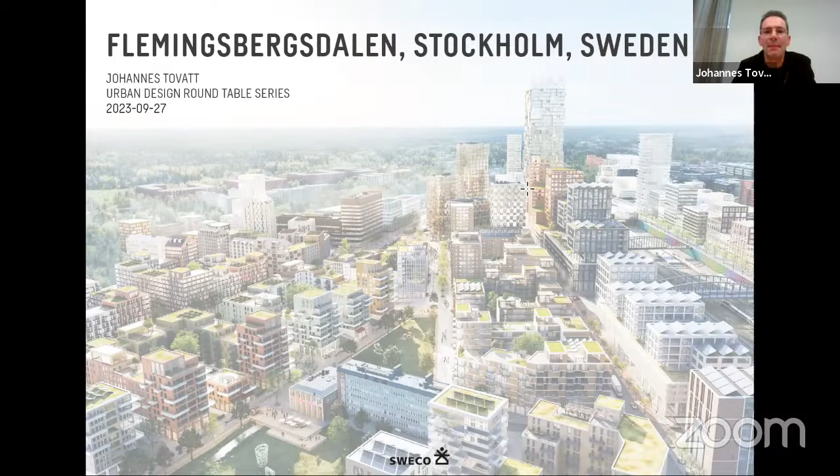Johannes Tovatt is my name, based in the very north of Europe, I would say. I'd like to show you one fairly big project we are doing right now in our office in Sweco, to the south of the city center here in Stockholm. But first let me give you a brief background on who I am, which is probably necessary.

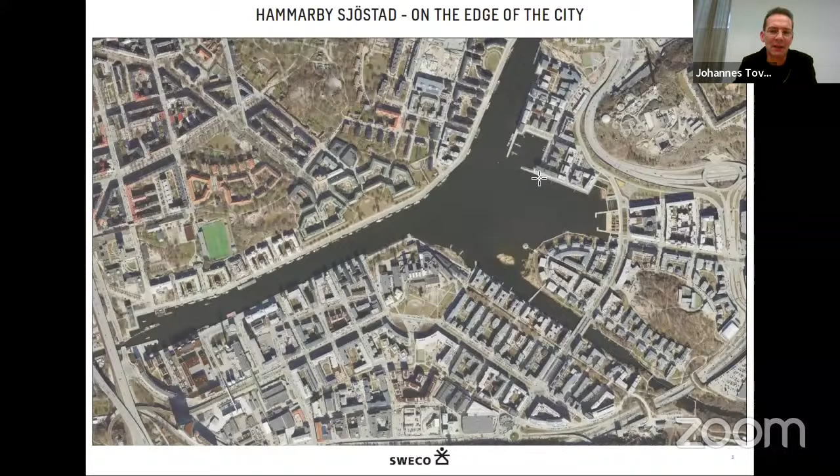I was taught during the 80s and 90s, and my school, one could say, was Hammarby Sjöstad, at the southern fringe of Stockholm, which was a paradigm shift in urban design and public transport, and in many other fields during the 90s. It's still not quite finished, but it's an urban development going on, really the revival of urban space in many ways, with a very clear concept about what a street or a space is, and it has a certain density across.

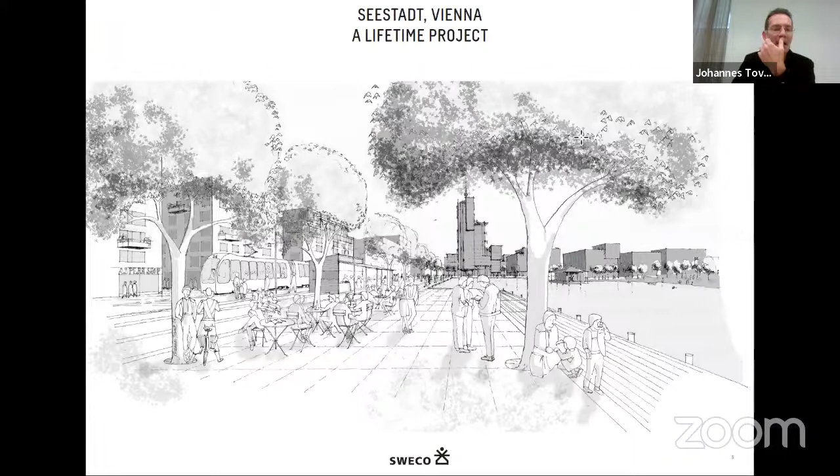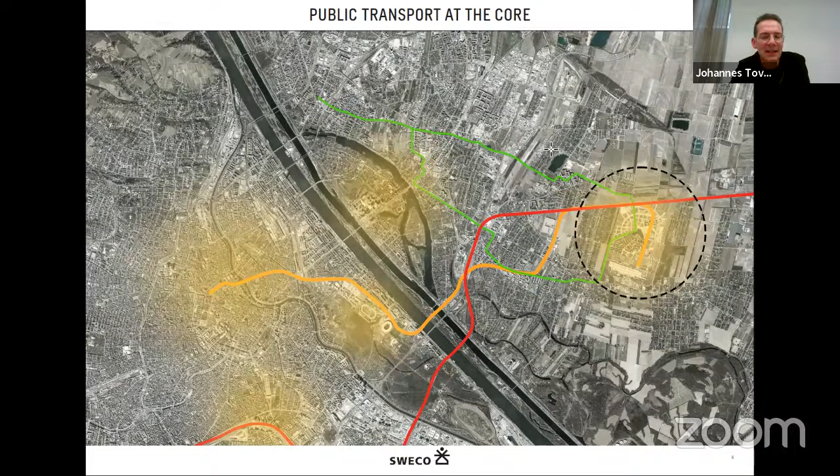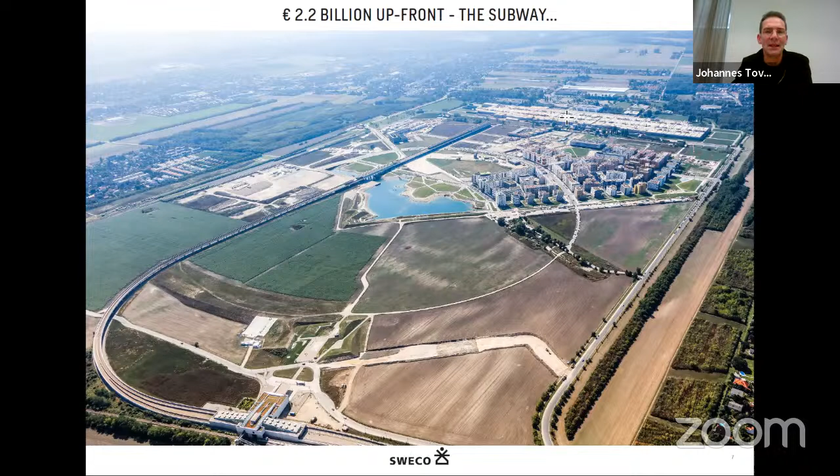I was fortunate then—in the early 2006 I won a competition in Vienna, another sea town, or lake town rather, just outside to the east of Vienna. I mention it because it took me from Stockholm down to Europe, and to a mega project in the Vienna outskirts where public transport and connectivity was at the very core of the business. This image from 2012 shows the Vienna project, where the city and the state invested 2.2 billion euros alone in bringing the metro line to the site, and now it's a fully integrated part of the urban realm and the space.

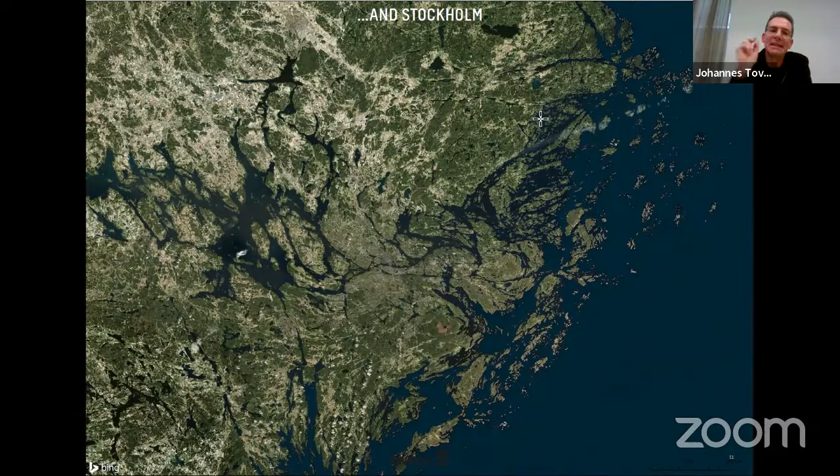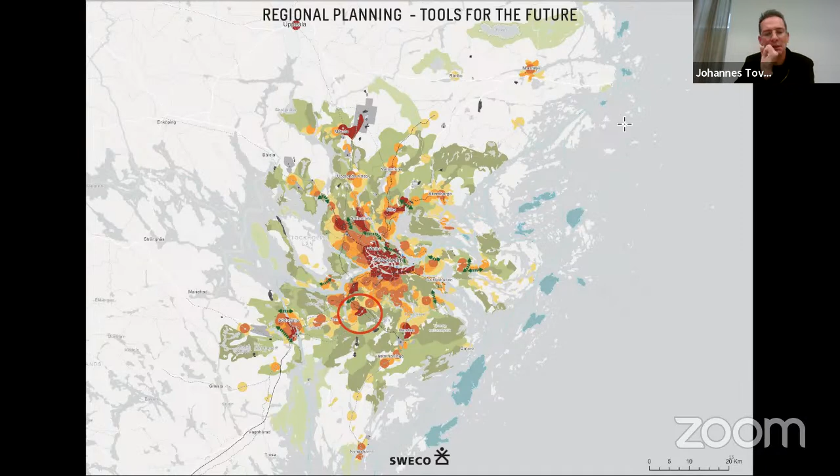One of our tools here in Stockholm—we have many tools to plan cities—is the regional planning tool, which is actually very important in terms of long-term planning for public transport, rails, roads, etc., so that the city works as a whole.

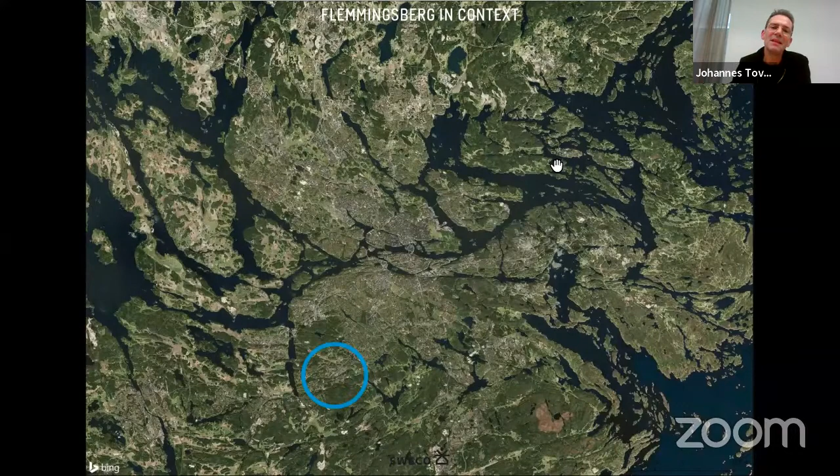My project is one of these regional nodes, which you can almost see here in the map—the very city center, the core meeting point between the Baltic Sea and the lake, occurs in the strait in the center of town. The ambition is to create urban nodes in a half circle around the city center, and the project I'd like to talk about is the blue circle around it.

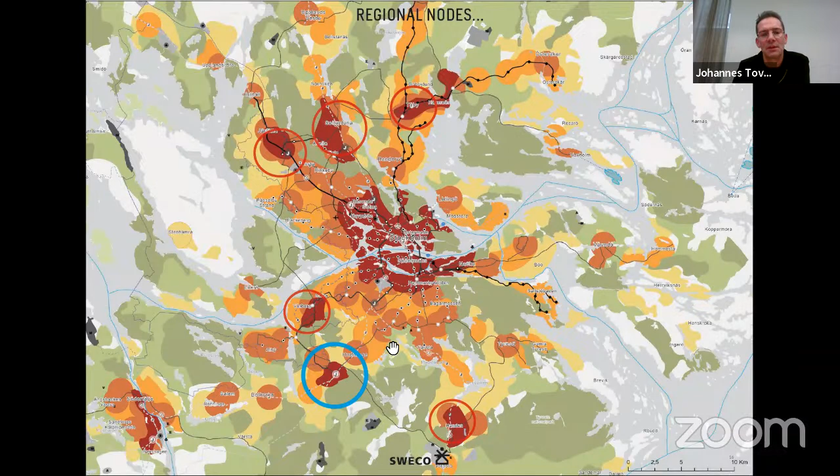Another important topic driving urban design and infrastructure development here is equality issues and social ways ahead, and there's always an ambition connected to big projects like this. As in many other cities around the globe, the southern part of the city has lower income and generally lower education, and this initiative is to turn it around and create more prosperity in the south.

And this is the site of the new regional hub. Difficult to imagine, but it's actually surrounded by vast, big scale housing areas, and a huge hospital, one of Europe's biggest hospitals, but of course it's cut in two, or more or less destroyed by national rail lines and all these barriers.

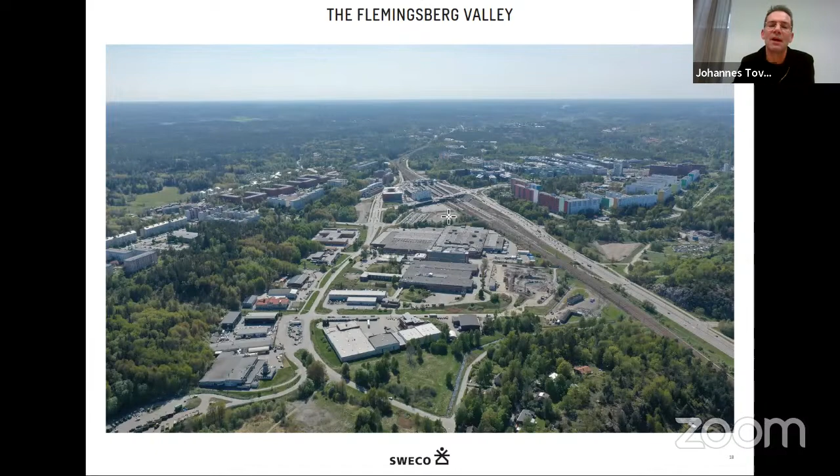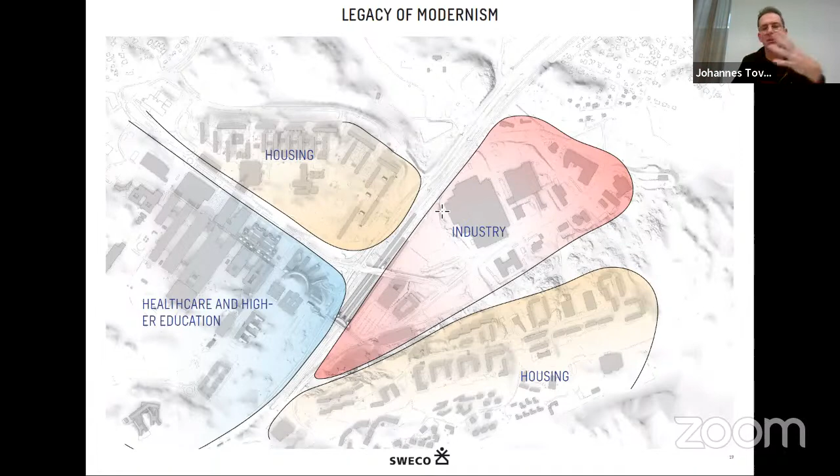It was also planned in a time when, from the modernist era so to speak, segregating people and functions, housing and industry, etc. was the norm. So it all had its spot, and in the middle of this, of course, the railway.

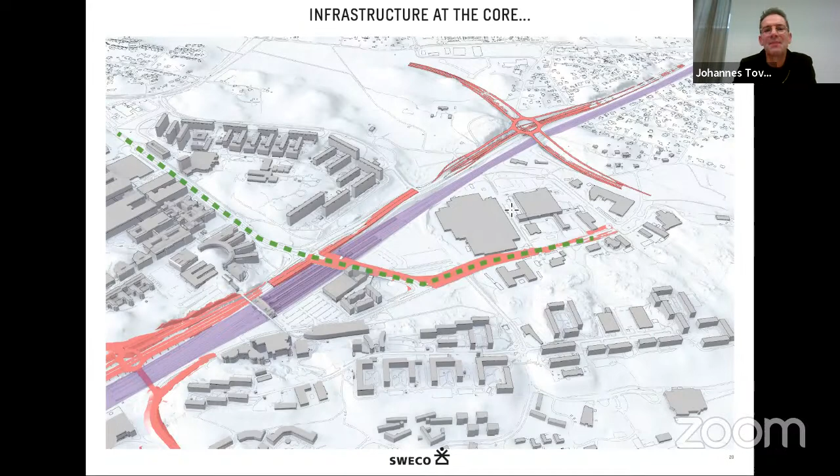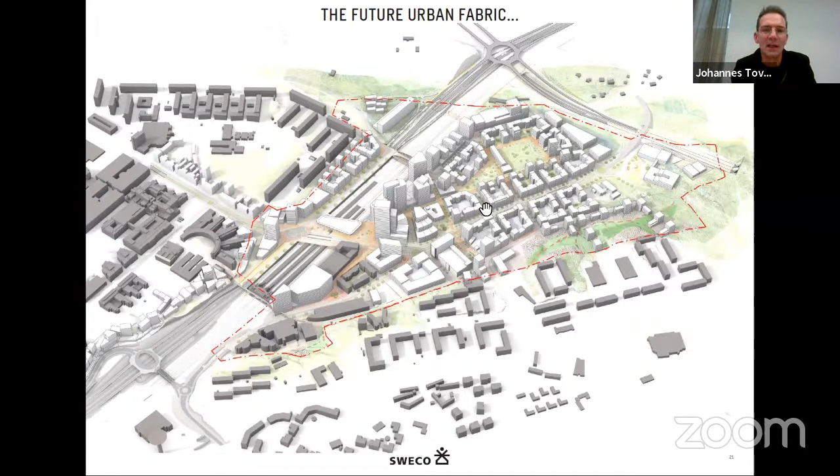And what's happening now is that this kind of infrastructure project is developing even further. High-speed rail, large-scale motorways. Doesn't seem very modern, but it's happening, personally unfortunately. And in this we've been commissioned to develop a new city core, which is quite abstract as an idea - how could you create a new heart in this kind of context?

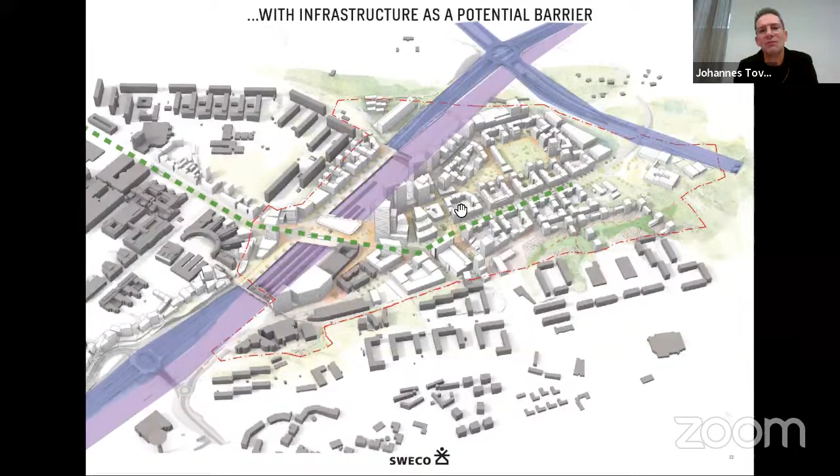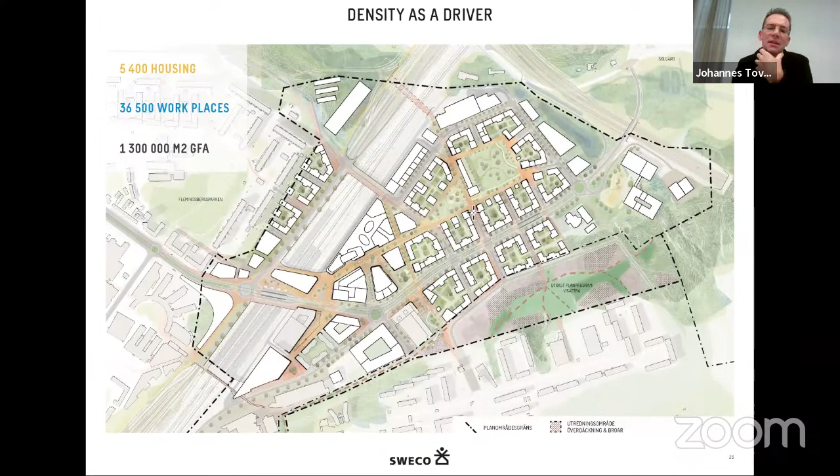And trying to integrate, or at least reduce, the barriers of the infrastructure, present and future. This is quite driven by density - for example, 5,000 housing units and a huge amount of workspace. So it's a high density area, which you can see on this early stage rendering here.

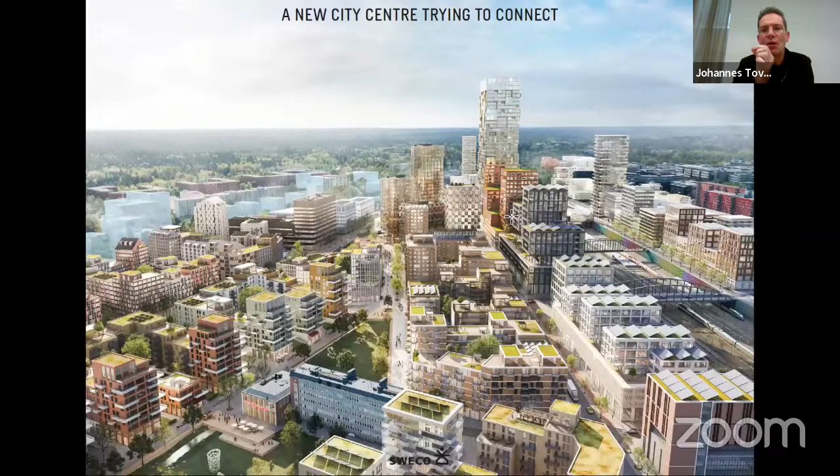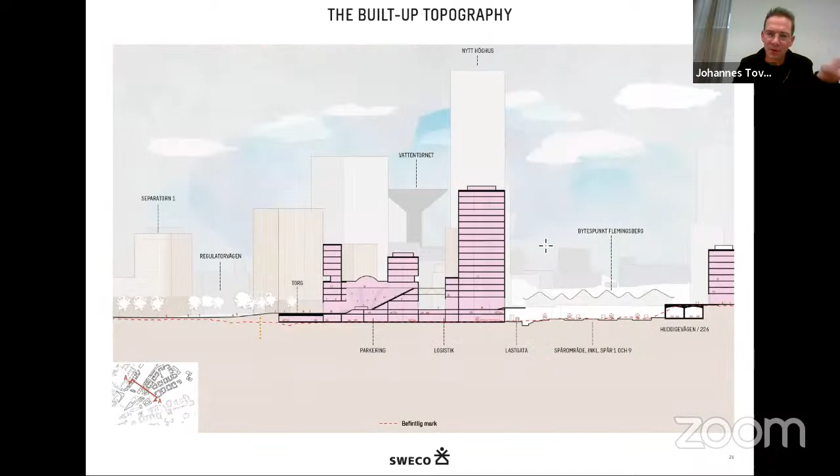Trying to focus, of course, on the extremely complicated edges around the rail tracks and the topography of the site. We've also been dealing a lot with the functional aspects of the new core of this city, which makes this into some kind of three-dimensional monster on all levels.

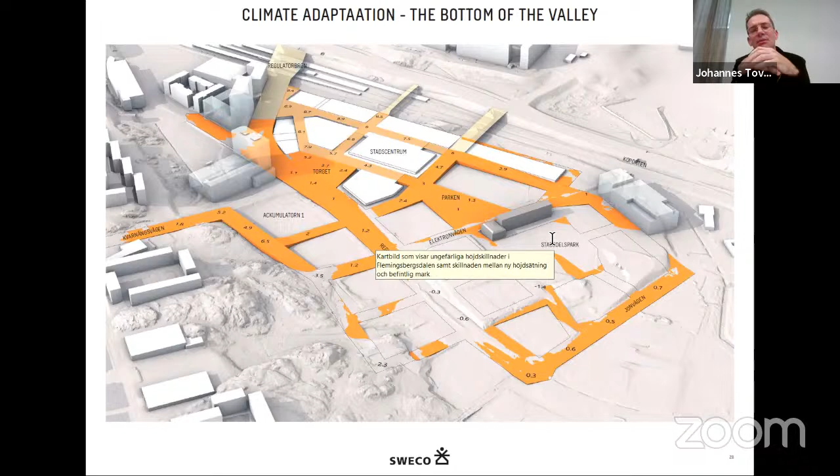And it's also governed a lot by the fact that this is a valley - we have the issues of stormwater and topography and artificial levels in the city space, or in the cityscape. So it's a super complex kind of planning exercise.

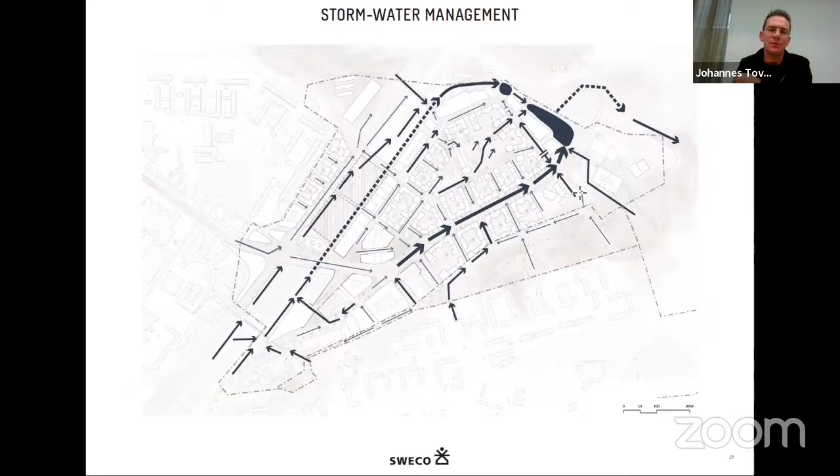And as I mentioned already, the whole issue of water - stormwater treatment, etc. - is an integral part of this scheme, more and more so due to various factors. This is already implemented in the early sketches, in public space, in streets, and in the way courtyards are distributed, and also how the urban structure has been developed, allowing water penetration, cleansing of water, and the stormwater aspect as well.

And the other part of doing something like this, immediately next to a very substantial public transport system, is of course to enable diversity of life across an area like this, inviting fundamentally new aspects of life.

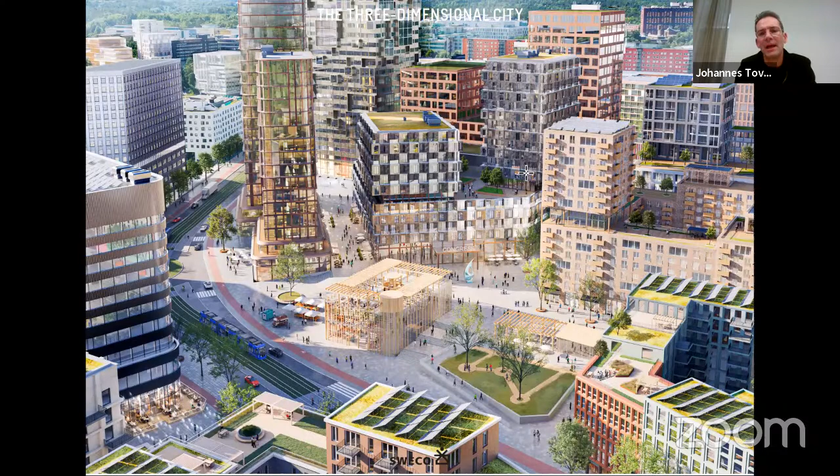And so this has been part of the early thinking - what is a space, for example? How does it link? How does it grasp into the surroundings, this rather poor area in general?

And moving forward, these are just images from the current revision of the previous image. We are now looking into much more detail of things, and we have entered into the formal stage of the inner circle here, the actual city center.

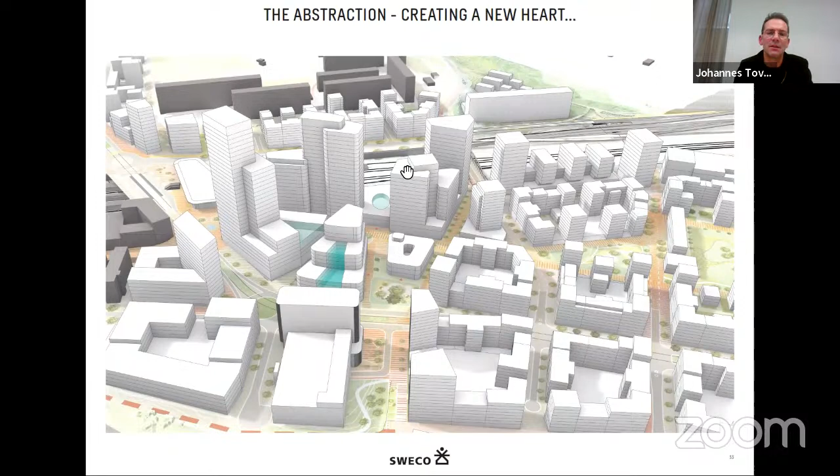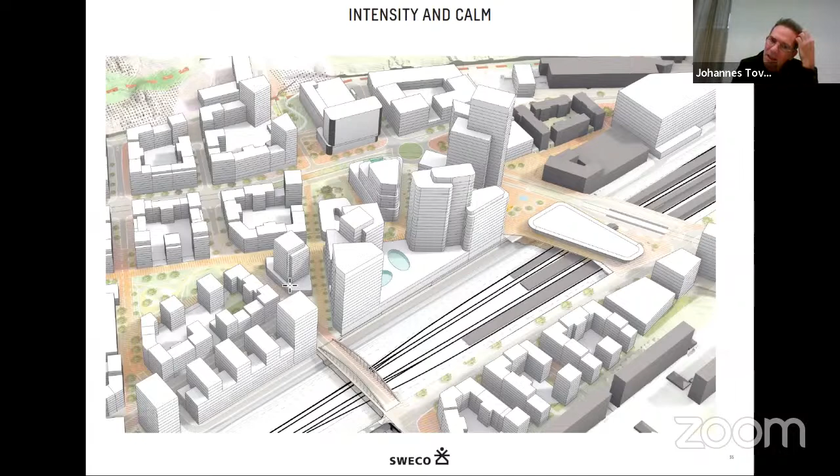Together with the landowner and the local authority - these images show, again, the issues of the barriers, the future station areas and the bridges across, and dealing with this kind of edge situation. And despite all this, creating some kind of calm and intensity in the urban fabric at this stage.

And of course, we're dealing with a lot of unknown issues. You know, when can a station be built? And yet at the same time, we need to start development in the area.

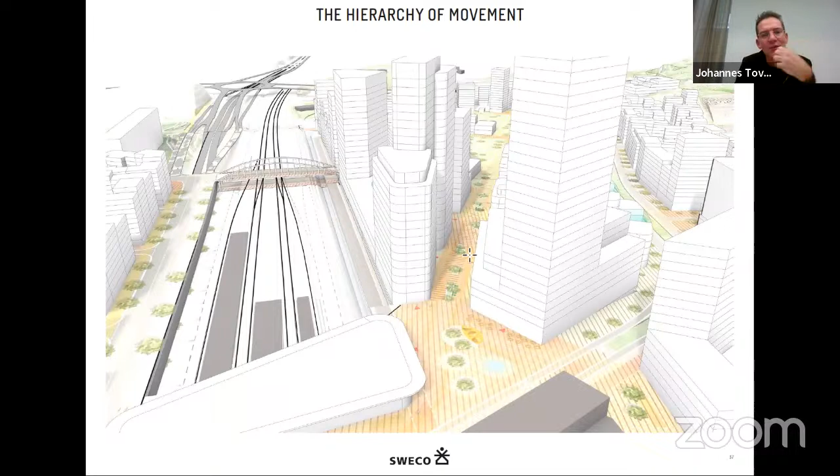Especially the issues of long-term connections and street patterns are very sensitive because of many still unresolved issues. But we are trying to - this is leading to my final image - we are working very tightly together with the region, politicians one could say, and the civil servants in the local authority.

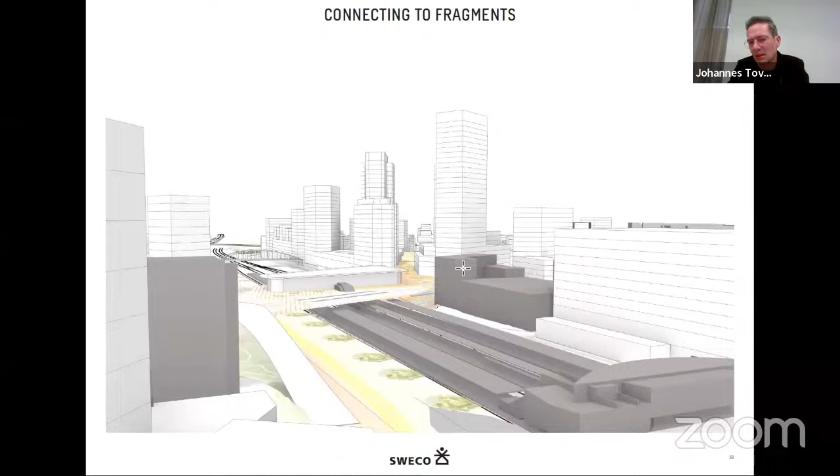And we are also connecting them back to the early slides here. We are very much dependent on the overall ideas of how this city will work in the next couple of decades, up to 50 years ahead. And this is just an image showing a potential first stage of this development.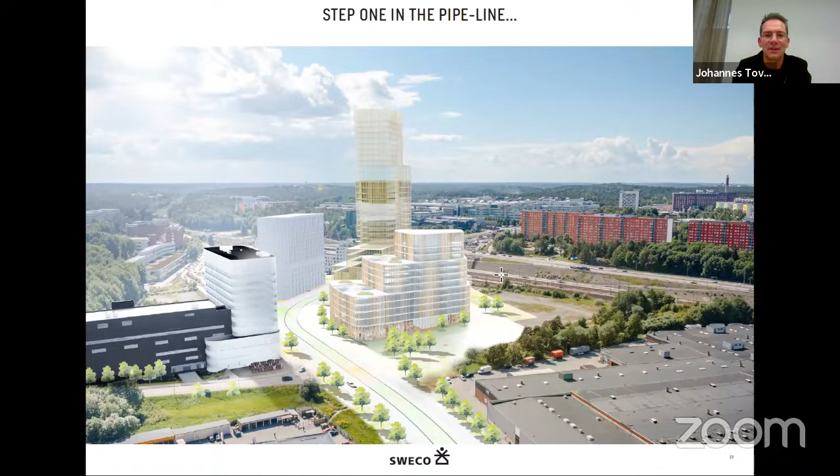Excellent. Thanks very much, Johannes. That was really great. So let me just... okay.

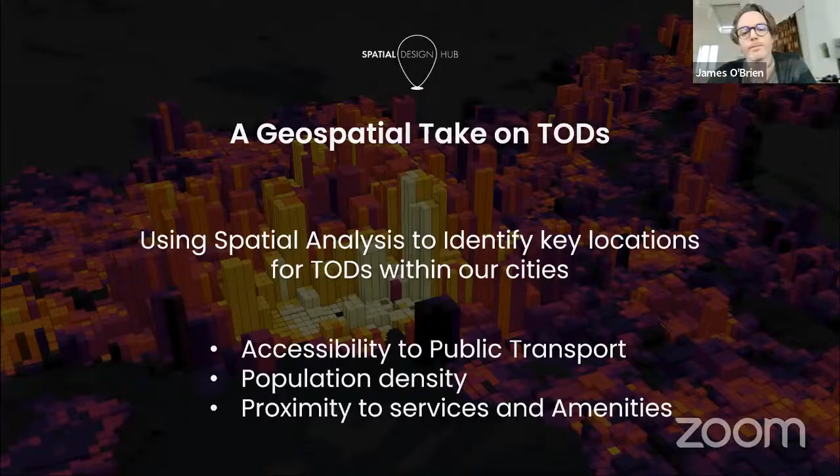So step one, we would carry out a public transport accessibility level assessment. Here in London, TfL, Transport for London, developed a tool called PTAL, Public Transport Accessibility Level, which measures accessibility to public transport. We've gone and created scripts using GIS and Python to use this anywhere in the world, basically.

The model looks into 4 parameters: the frequency of the services per hour, the distance from any start point on the network or city to its nearest stop for each transit node, the wait time between services, and finally a reliability factor on how reliable the service is at that particular location.

As we all know, not all of our cities behave in the same way. So first we need to set some parameters about walk times to transit nodes. Here in the UK, we use 8 minutes to a bus stop and 12 minutes to a railway or light railway station. But depending on your environment, people might not necessarily be willing to walk that length of time if it's too hot or too cold. So you can adjust these depending on your city.

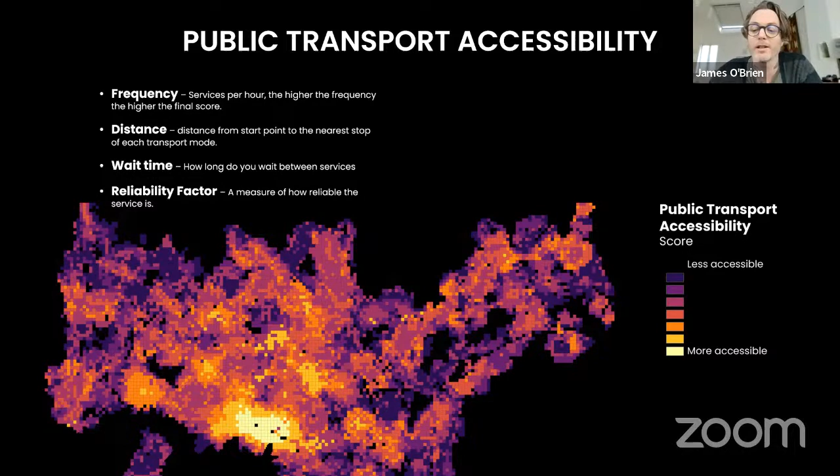So overlaying the population density next helps us to identify how accessible our transport network is based on where people actually live within our cities.

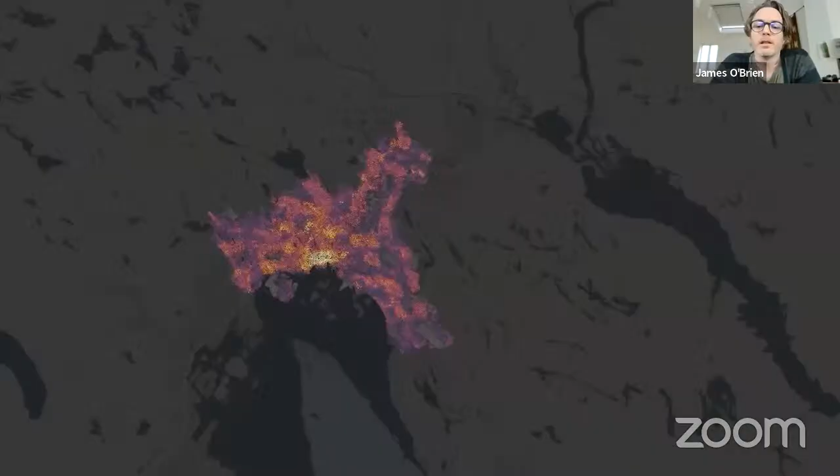By doing this, we get some key insights into 2 areas. The first is areas with low accessibility and high density, giving great potential for new or improved transit hubs in our cities. The second is high accessibility and low density, giving potential for mixed use developments within our cities.

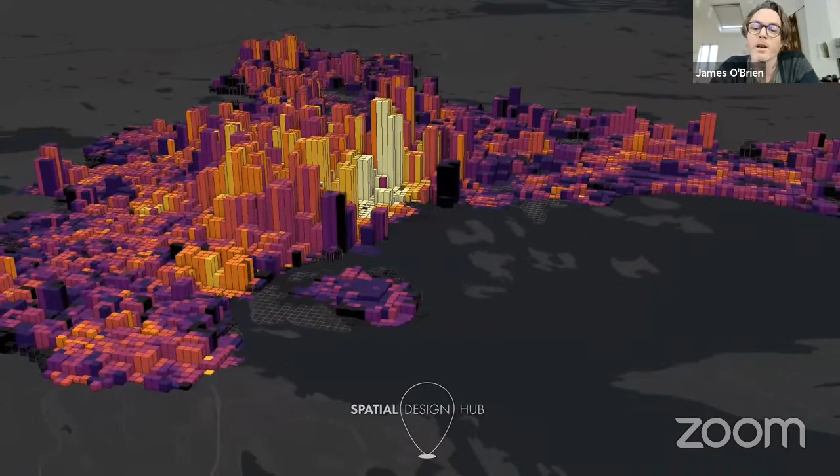So we've now managed to identify some key potential areas in our cities for TODs, but next we might want to see what these areas offer to people living there, and ask questions about what's missing and what could be included to improve these locations for people.

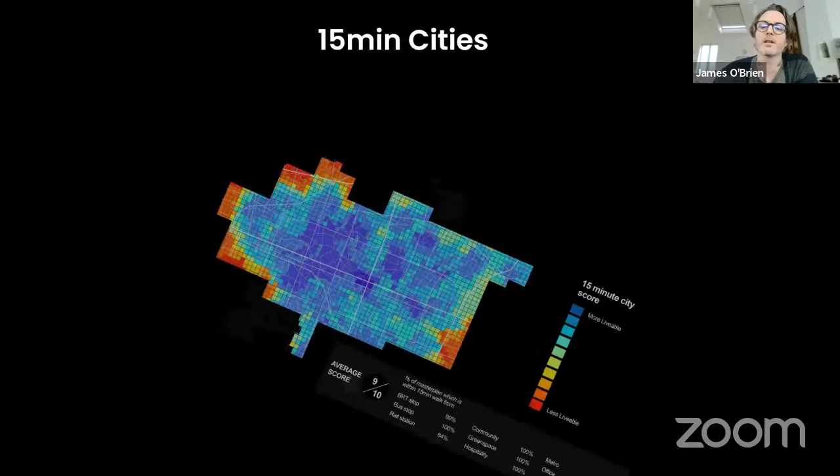So to do this, we look at the 15-minute city concept, using GIS to analyze the proximity of services and amenities. We'll identify key amenities and land use and rank them by their importance within the urban environment by applying a weighted score to each amenity.

We then run multiple iterations of this model for different urban characteristics to build out a final output that reflects the entire city. For example, one area might have a greater need for places of worship, another area might have a greater need for green space or office, and all this can be built into the analysis.

So the model identifies gaps in the services and amenities, and most importantly for this type of work, it identifies what's missing in these areas. From this, we can see the areas that have a low score on proximity to services, which could be great for mixed use development, and areas with a high score on proximity to services, which might be good for more residential or office-based developments.

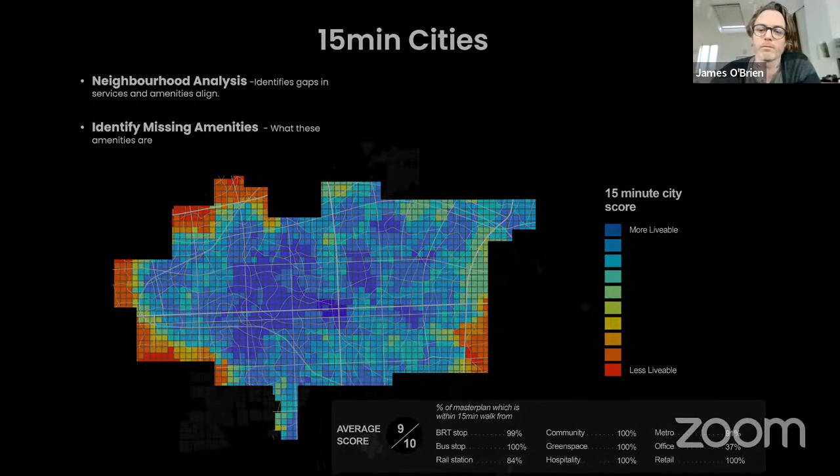So loaded with this information, we can create a site suitability analysis for cities by using a weighted combination of all these factors: public transport accessibility level, proximity to amenities and services, and population density. Just to note, this is a framework approach we can build on. For example, there might be other characteristics of importance in your city which could also feed into this type of analysis to find more suitable locations. Using these three factors, we can apply different weightings to the analysis for density, proximity, and accessibility.

This will help us identify areas for new or improved transit hubs, mixed use development, residential, office, etc., which can then help lead the way for developing areas around our transport hubs in a way that's beneficial to the people who live, work, and move through these areas, creating more integrated communities, bustling business areas, and healthier, sustainable environments in our cities.

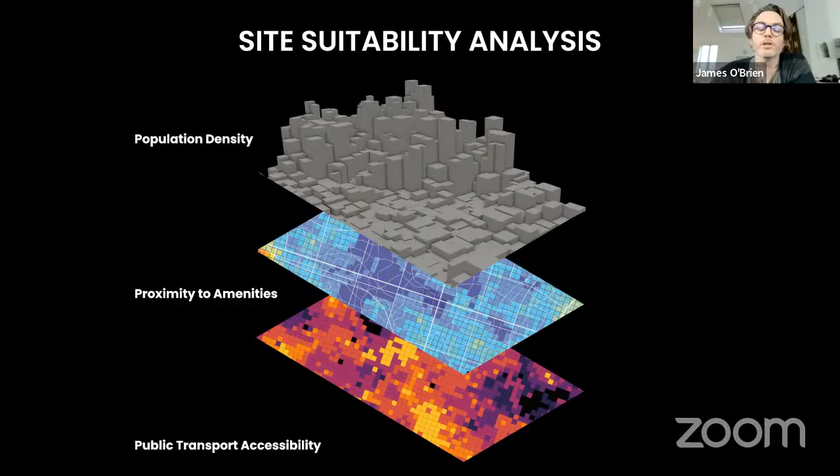So that's the end of my very brief presentation. I'd like to say thanks very much to Naama and the team at Smart Density for having me on this webinar today. It's my first ever one as well, so it's been a pleasure.

You did great, good for you. Great, I'll hand you back over to Naama. Yes, thank you very much.